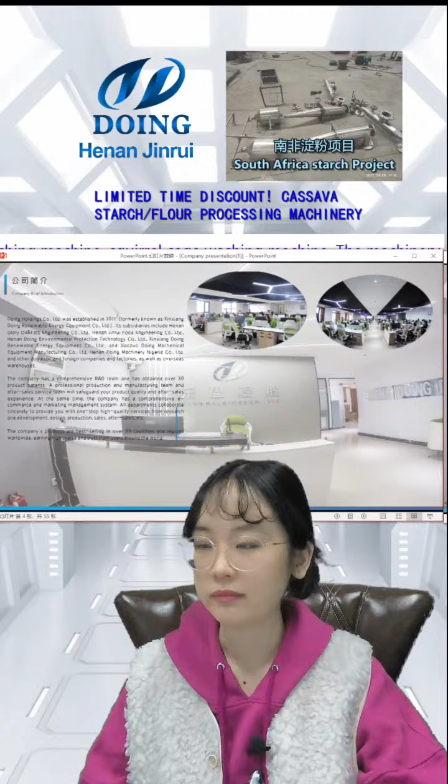So let's get started. First of all, I want to introduce our company's contents. So first of all, it's the company profile. Look here, our company named Doing Holdings. It was established in 2011 in Henan, China, Henan province.

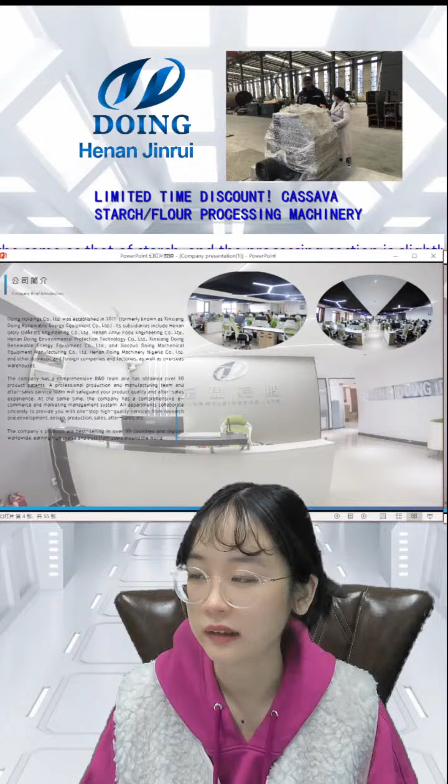We include Henan Glory Oil Fats Engineering Company, Henan Jinrui Food Engineering Company, Henan Doing Environmental Protection Technology Company, and Xinxiang Doing Renewable Energy Equipment Company. Also here is another very special one: our Nigeria limited company, and in Nigeria we also have a warehouse, because the warehouse is overseas in Nigeria.

It maybe can make it more convenient for you to buy our products, and if you have a problem, you can first go to the Nigeria company to find our engineers or sellers, right? So I think this company is very important to overseas customers.

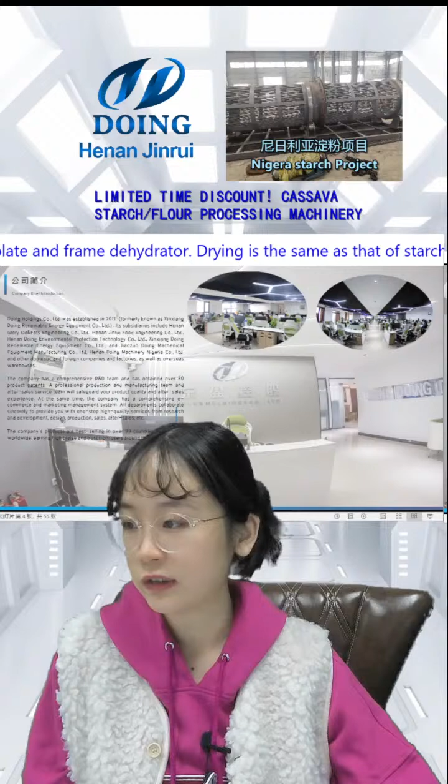Okay, so next. Here is our company, in Henan Zhengzhou. It's a big city, and the transportation is very easy. If you guys want to come to our company, our office, to have a look, maybe you can leave your message in the comments, okay?

And here is what our factory looks like. The factory is near Henan Zhengzhou, and this company is very big. It's like a 40 minute car ride, and we will arrange a car for you if you guys want to have a look, if you're interested in our products.

Okay, so if you want to make some starch or flour, or gari, fufu, or build a factory for this kind of thing, you can contact me. Because we are a very international company around the world.

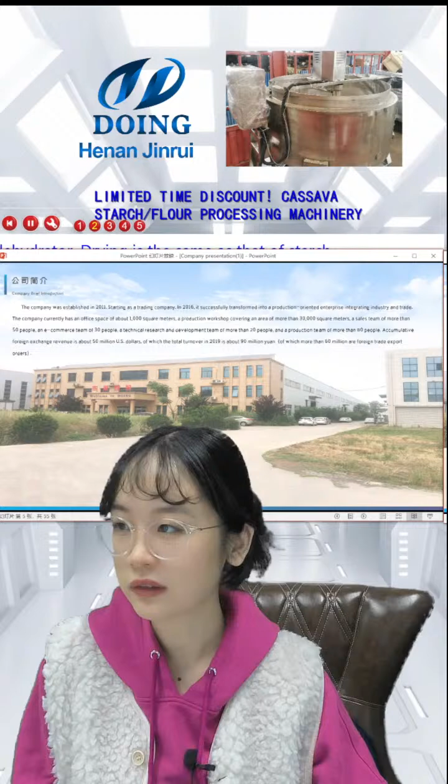Okay, so next one. This is a bigger factory, like this. And here is the company structure. Because we need to make you happy, make you very satisfied, we have many kinds of structure.

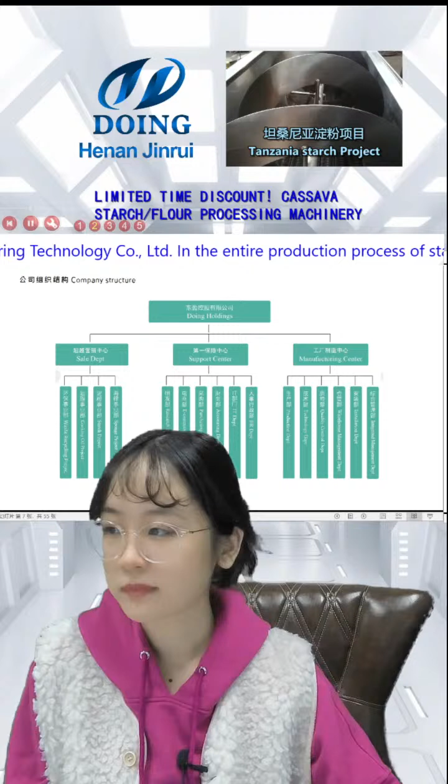Like I am in the sale department, and here is where I stay in, it's the starch project, right?

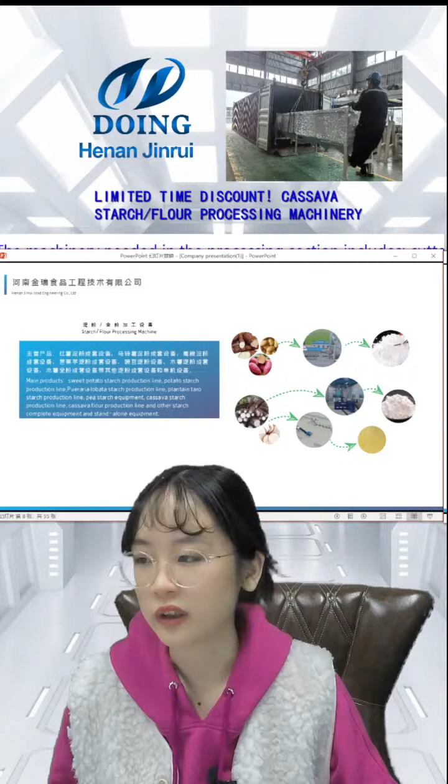Okay, so here are our main products, like sweet potato starch production line and potato starch production line, and also cassava starch, cassava flour processing line. If you guys are interested in our company, please quickly contact me, okay? Because we have limited time discount today.

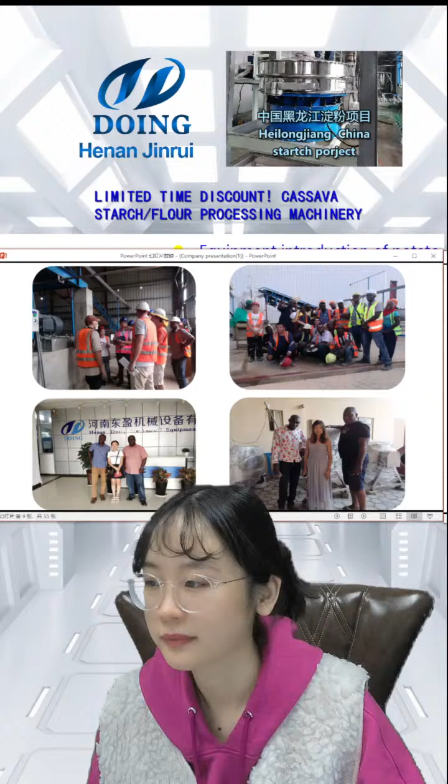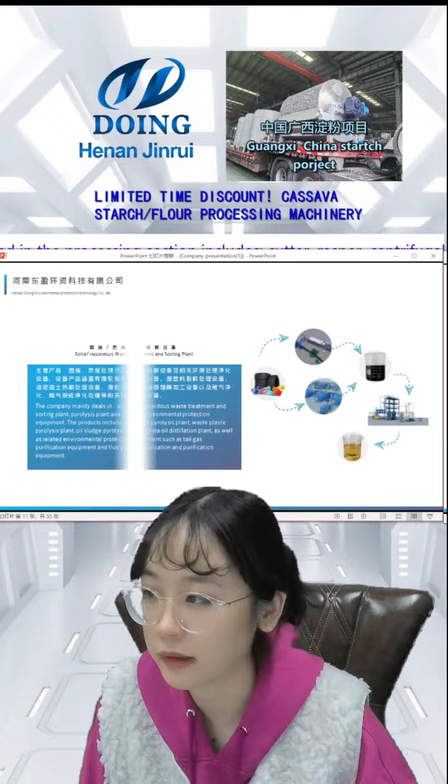Because I'm in the starch company. Yeah, here is also a belonging company, it is a sorting plant. And here is another one. We have 4 belonging companies.

They have different kinds of things to sort. Here is an ISO certificate and the national patents.

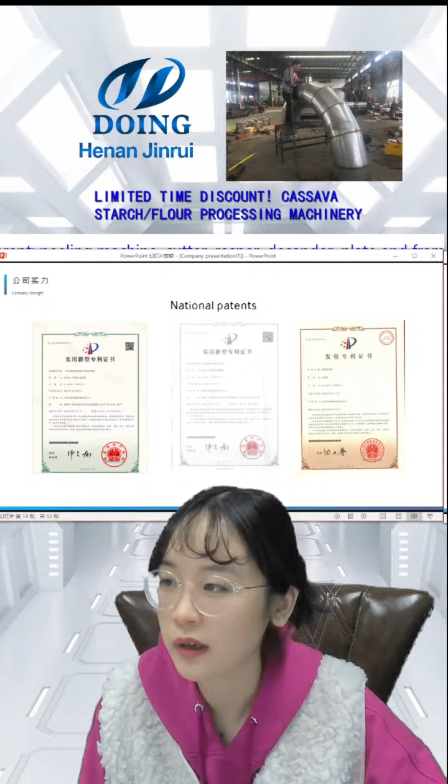So don't worry, our company's equipment is not unsafe or not good. Our company has many different certificates. You can be very satisfied.

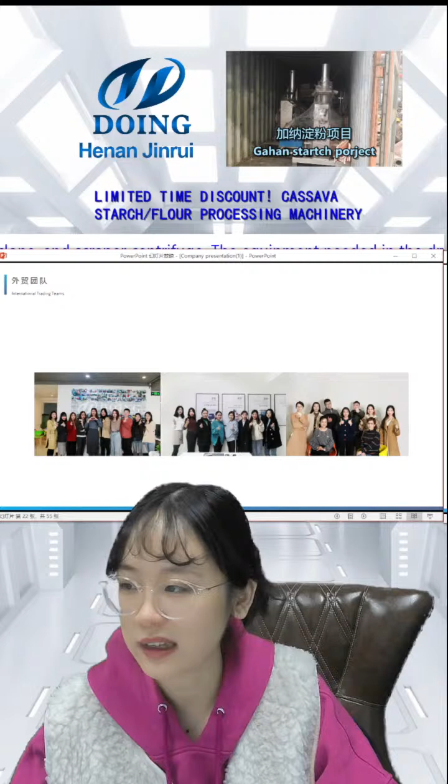Okay, here is our international trading team, and if you come to our company, you can see them. And overseas sellers, e-commerce and IT team, engineering team, and here is our production team. Yeah, here is our factory.

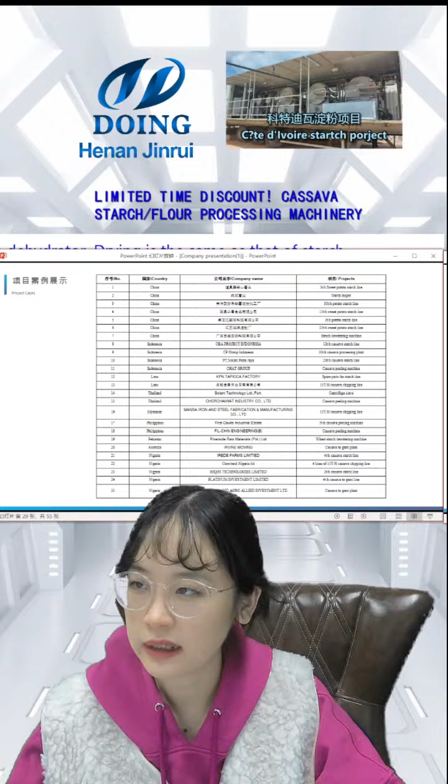And here is our project cases, many different countries, and also in our country, in China, like sweet potato starch line, potato starch line, and Indonesia has a 20 ton per hour cassava starch line. You can have a look.

And DR Congo, Syria, Lebanon, Uganda, many different countries have our projects. Okay, look, here are some photos.

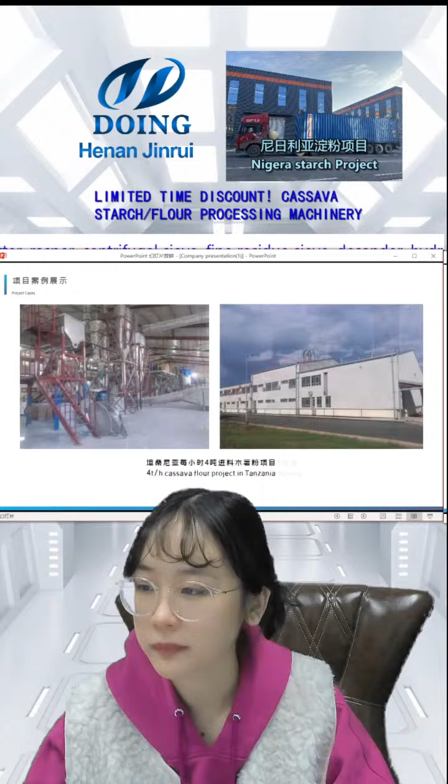And also here, this video is also about our project here. Nigeria has many of our projects. Yeah, this one is also in Nigeria, in Tanzania.

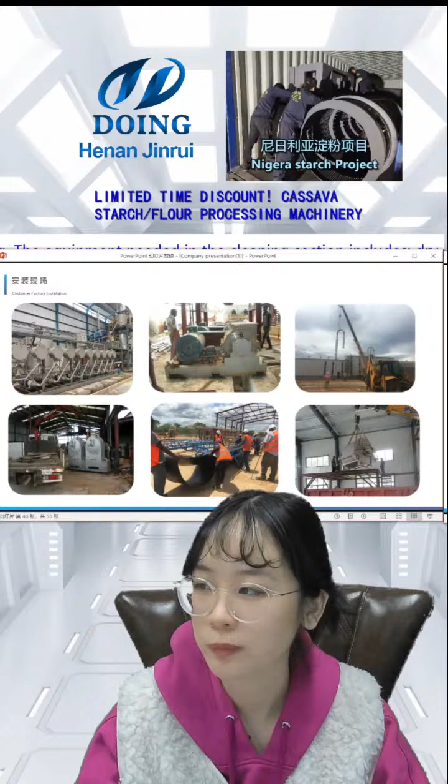Here is machine delivery. And this is the customer factory installation.

Equipment introduction. Here I will introduce what kind of machines the cassava starch or cassava flour processing line needs. Okay, let's go. Here is the cassava feeding hopper for short storage of raw cassava and uniform feeding.

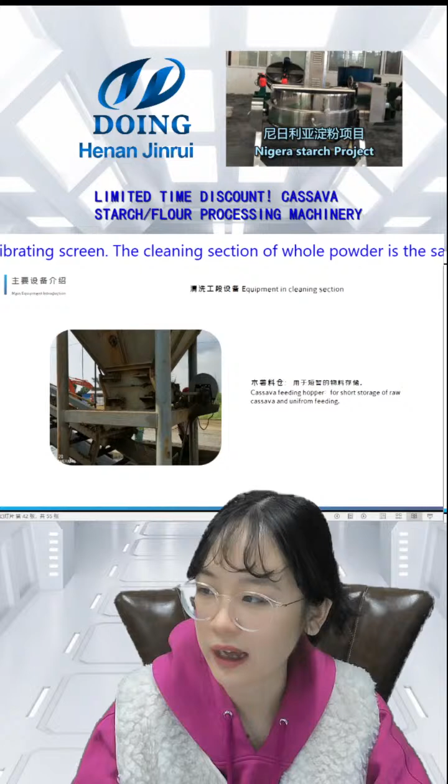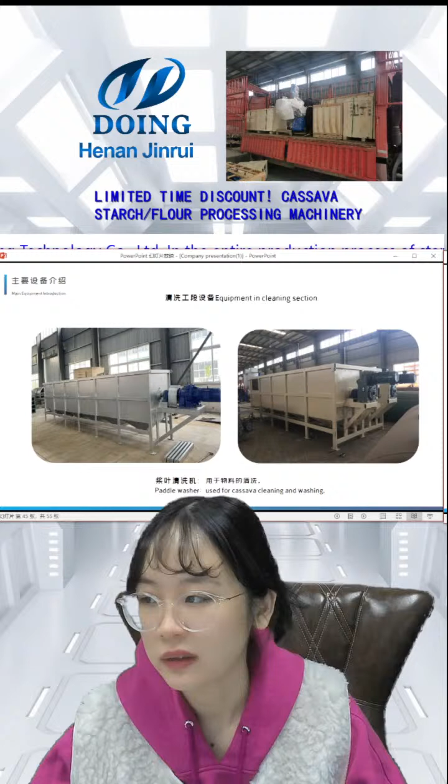Here is the paddle washing machine, the main washing equipment for cassava. If you have different needs, we can give you different kinds of machines. If you only want a small one, we can build a small one for you.

Look at here, this is only one. But if you have a big amount of cassava to process, you can choose the two-pole one, and it will clean the cassava very cleanly.

Here is a cutting machine. It has a knife to cut the cassava into small pieces. This machine is used for crushing of cassava.

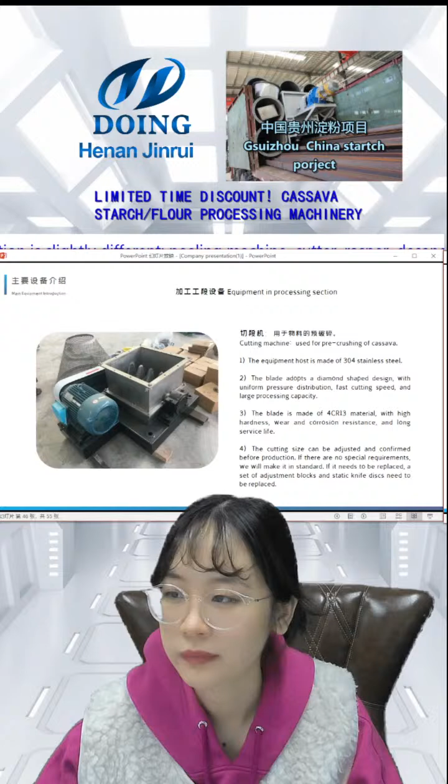Here is the blade, made of 4CR13 material. It's very safe for eating. This knife maybe looks like a diamond. It is 4CR13 material with high hardness, corrosion resistance, and long service life.

This one is for pre-crushing. Here is the second stage crushing of the cassava. This machine is named the rasper, and the rasper can turn the cassava into cassava milk.

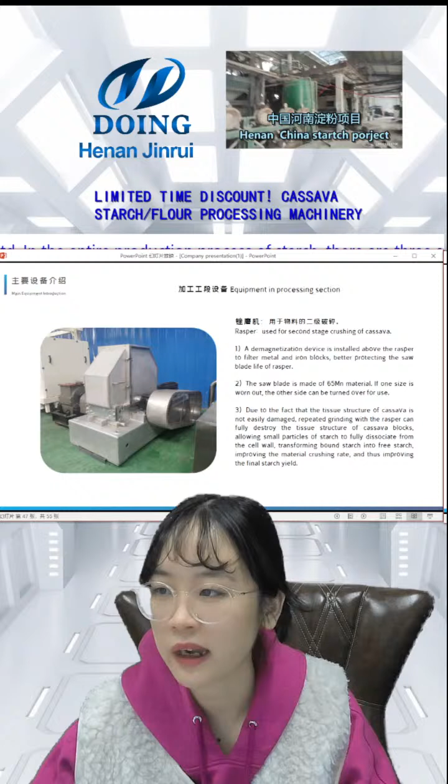A demagnetization device is set above the rasper to filter metal and iron blocks, better protecting the saw blade life of the rasper.

You know, the rasper has many blades. So if you want to protect the blades, you need the demagnetization device. The saw blade is made of 65Mn material.

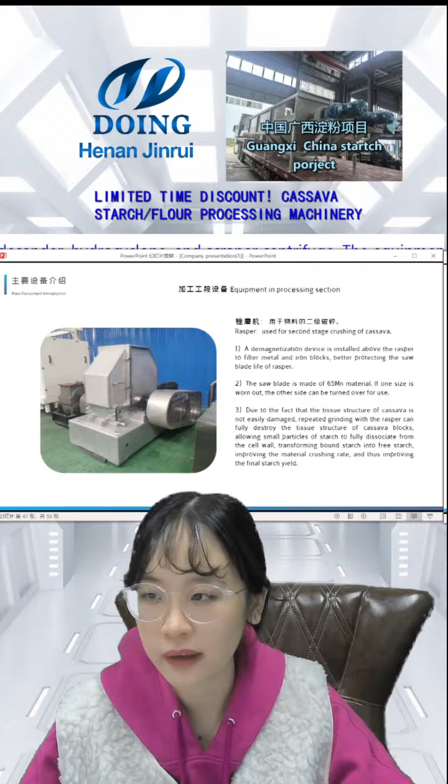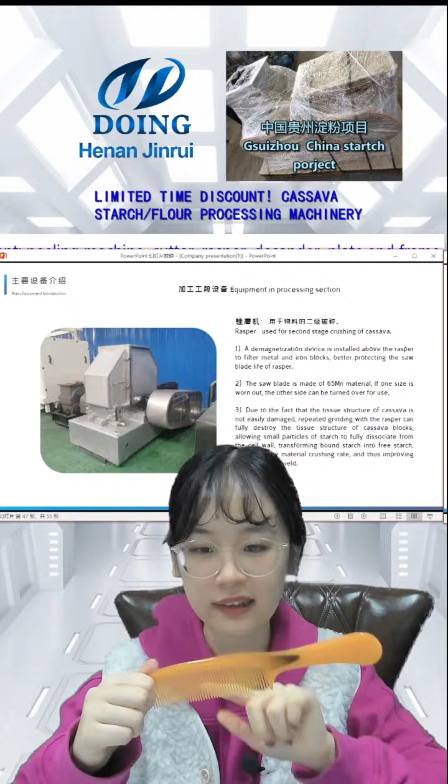It is also good, safe for our eating. If the blade is old or broken, you can use the other side of the blade. Look here, this is the blade, and you can change to this side because our blade has 2 sides - both can be used.

So here is the centrifuge sieve.

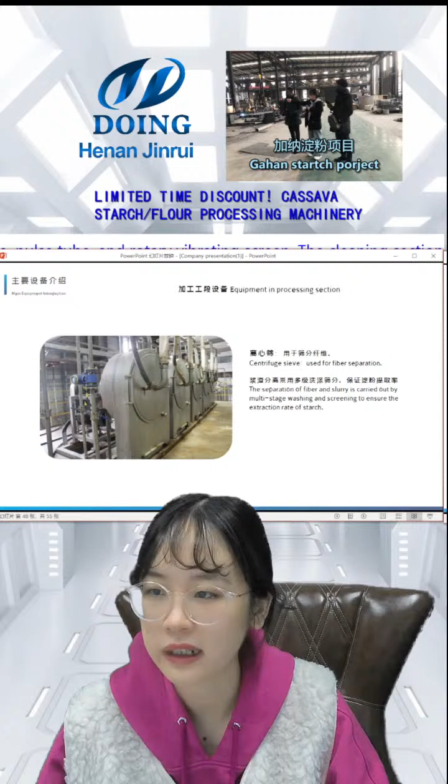For the cassava starch, we need this centrifuge sieve, because the separation of fiber and slurry is carried out by multi-stage washing and screening to ensure the extraction rate of the starch. So we need nearly 4 centrifuge sieves.

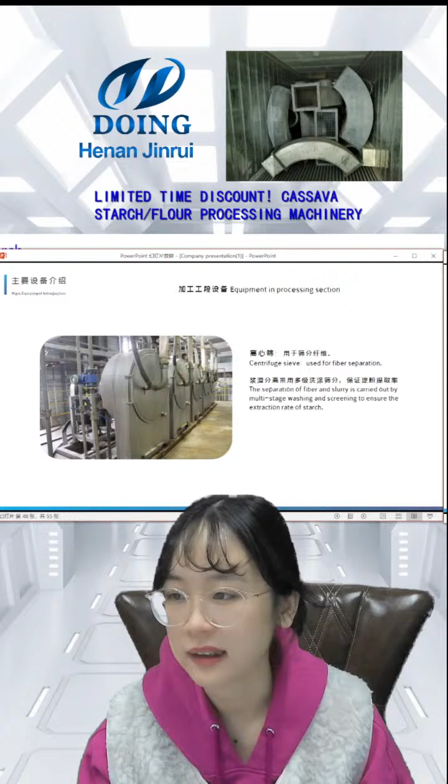One by one, they each have different work, but they all separate the fiber and make the cassava more excellent for eating.

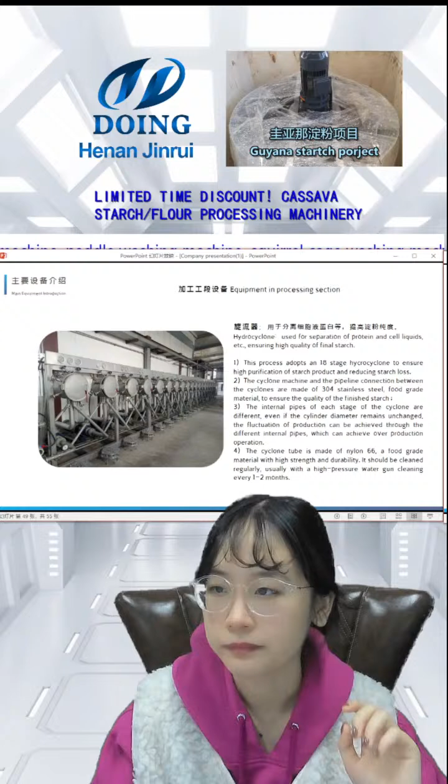In the 18 stages of the hydrocyclone, it ensures high purification of the starch product and reduces starch loss. The pipeline connections between the cyclones are made of 304 stainless steel, food grade material, to ensure the quality of the finished starch. Here is the tube of the hydrocyclone.

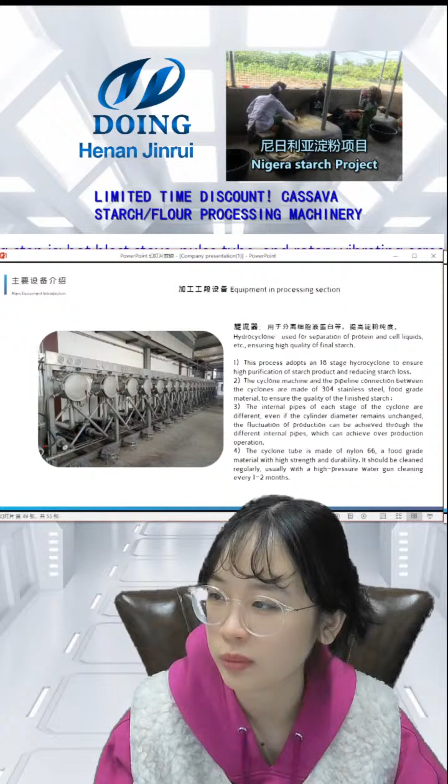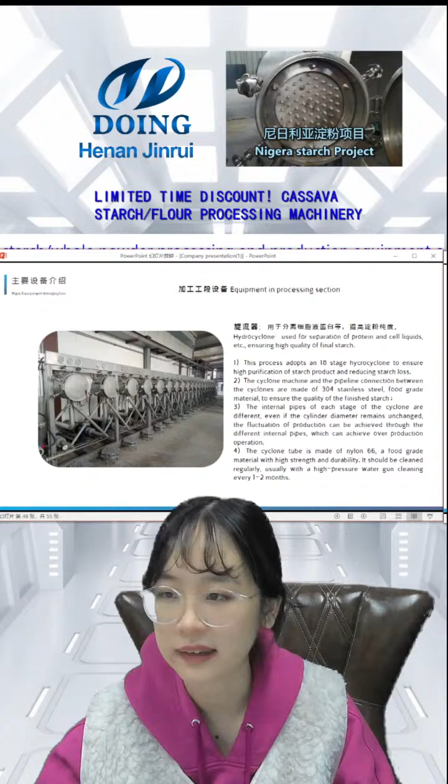Why do we need 18 stages? Because the hydrocyclone is for cleaning and screening, and it can make the quality better. The centrifuge machine sieves out the fiber, but here it separates out the protein and cell liquids, which we don't need. So we need this machine to ensure the high quality of the final starch.

Look at this smaller one, it is the inside of the hydrocyclone, the cyclone tube. The cyclone tube is made of nylon 66, also a food grade material with high strength and durability.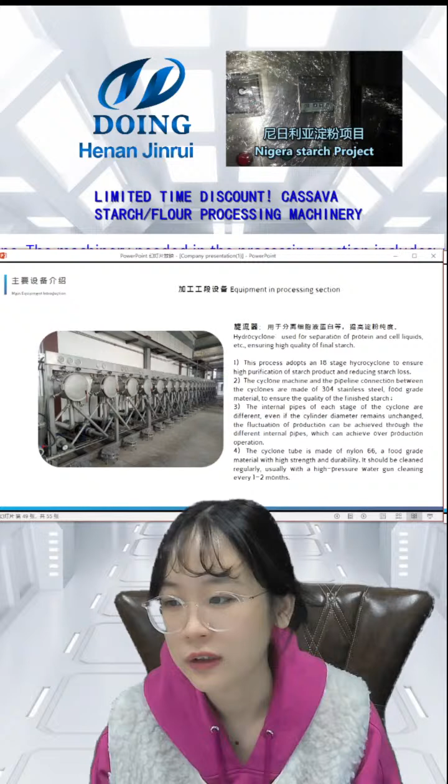It should be cleaned regularly, usually with high pressure water, every 1 to 2 months. It's easy to clean.

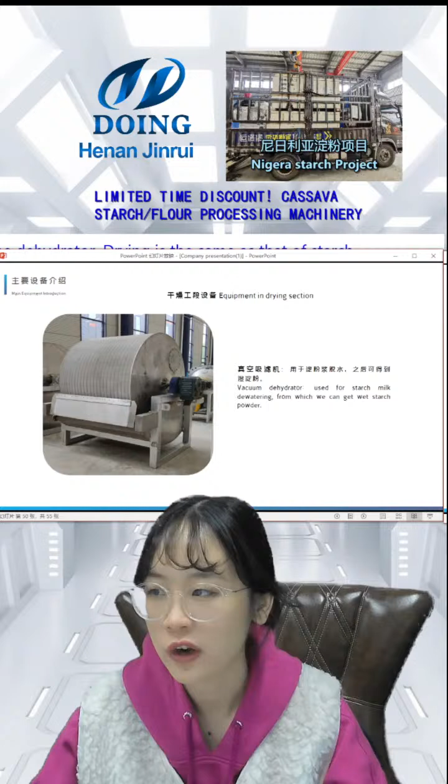So next picture here is the vacuum dehydrator. When the starch milk is in this machine, it will dewater, from which we can get the wet starch powder. It's easy for making the cassava starch drier. We use this big circle drum. It will turn around, and our starch will fall on the surface of the dehydrator.

Okay, next, here comes the flash dryer. It is used for starch drying. Look at here, our tube uses the pulse tube design. This tube may be different from the other starch equipment company because this tube is one thin and one thick. It can control the speed of material passing through, extend the residence time of the material, and ensure the drying effect.

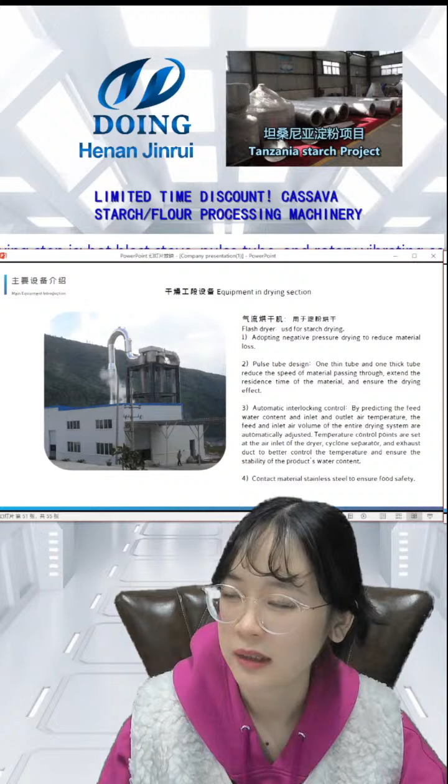Yes, so the cassava starch or cassava flour all need this kind of section. When the material goes into this tube, it will go not too fast. Maybe it can be a little short, or it can use a little longer time, because we need to make all the material be dried. So we use this design.

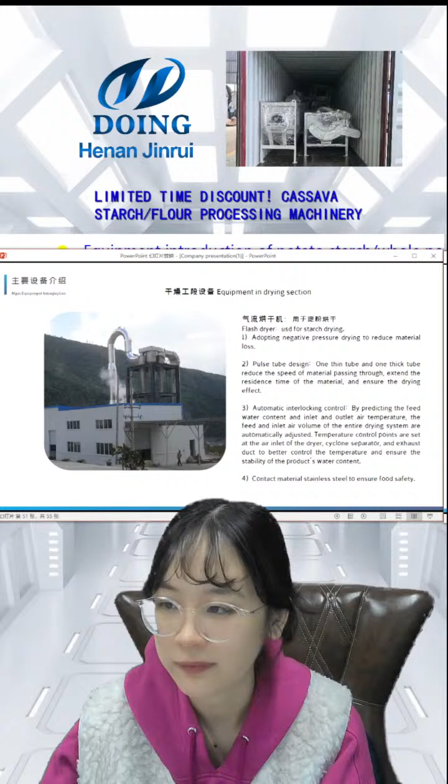And here is the automatic interlocking control. By predicting the feed water content and inlet and outlet air temperature, the feed and the inlet air volume of the drying system are automatically adjusted. Temperature control points are set at the air inlet of dryer, cyclone separator, and exhaust duct to better control the temperature and ensure the stability of the product's water content. This kind of design also can prevent explosion, and it can prevent the starch from running out of the tube.

And this is called the negative pressure drying.

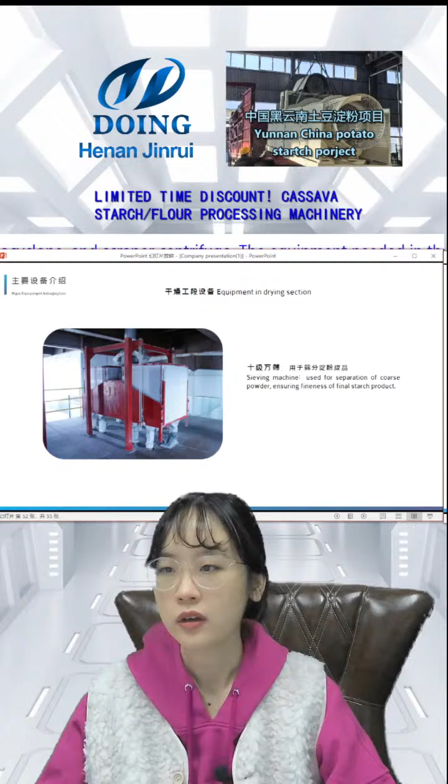And here is the sieving machine, used for separation of the coarse powder and ensuring fineness of the final starch and also final flour. Both the flour and starch need this machine.

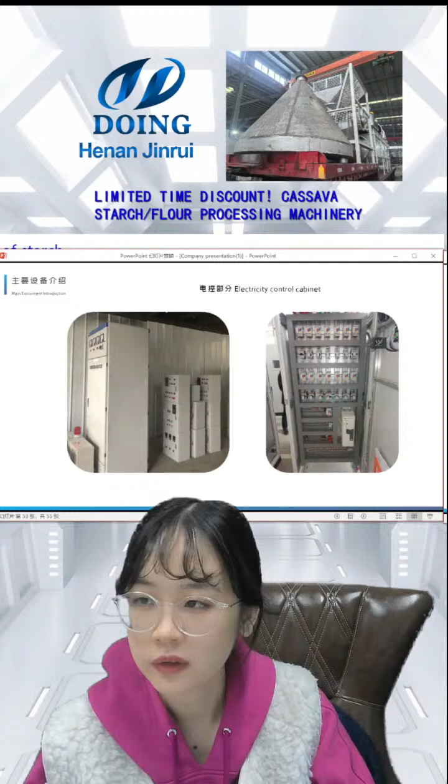And here is our PLC control part. It is a cabinet, and on this cabinet's surface there are many different kinds of touch parts. So you can decide what you want on this cabinet, like you want the temperature to be higher or lower, and also you want to begin this machine or finish this machine. You can choose the starch to be more thin or more thick. So this is the main way of the electricity control cabinet.

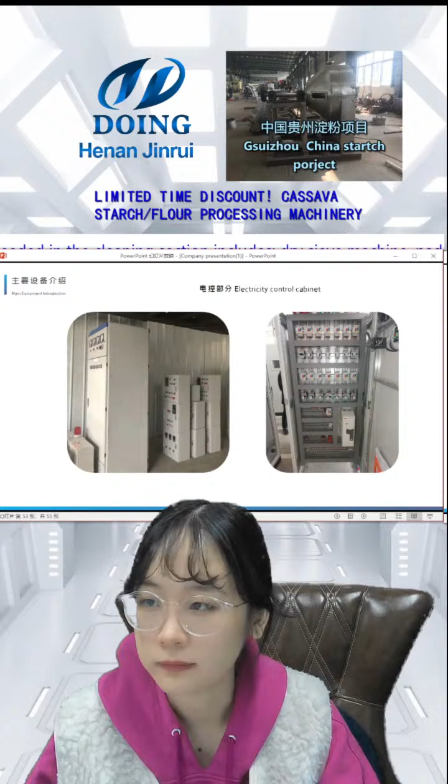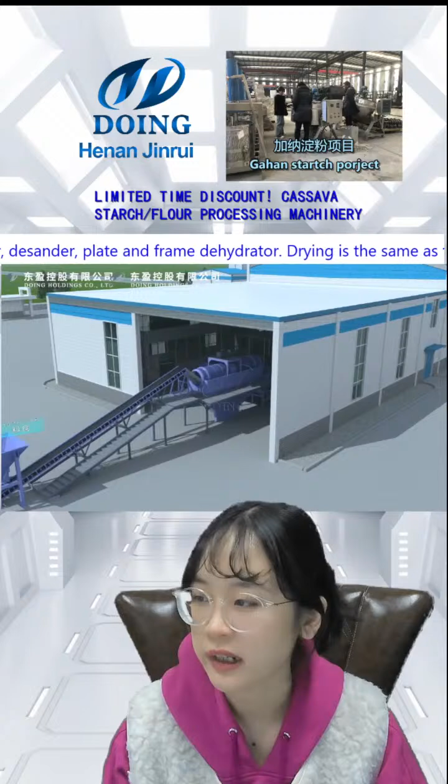And here we also have a 3D cartoon of the cassava flour, and also we have the cassava starch processing line 3D cartoon. So we can have a look one by one. First, here is a feeding hopper. Here is a shaker. The shaker will shake the cassava on the belt conveyor and send it to the dry sieve.

And here is an overview of the factory processing line.

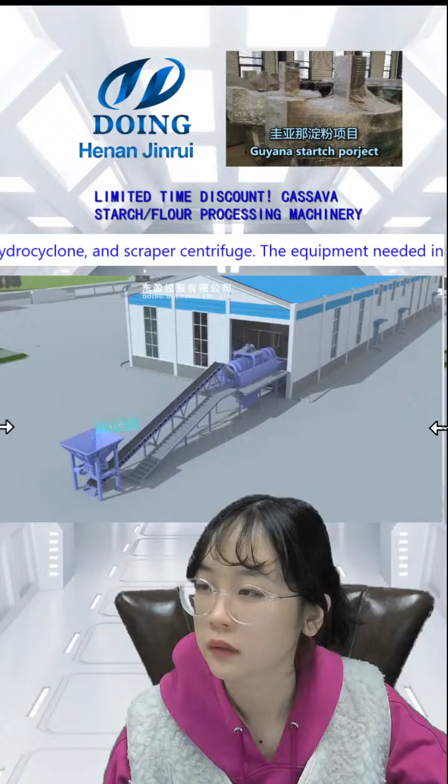Here is the starch processing line. Let's have a look. Here is the overview of all the factory.

So first we use the forklift to put the cassava into the feeding hopper, and it goes to the dry sieve. It can remove the debris from the surface of the cassava, and then go to the paddle washing machine.

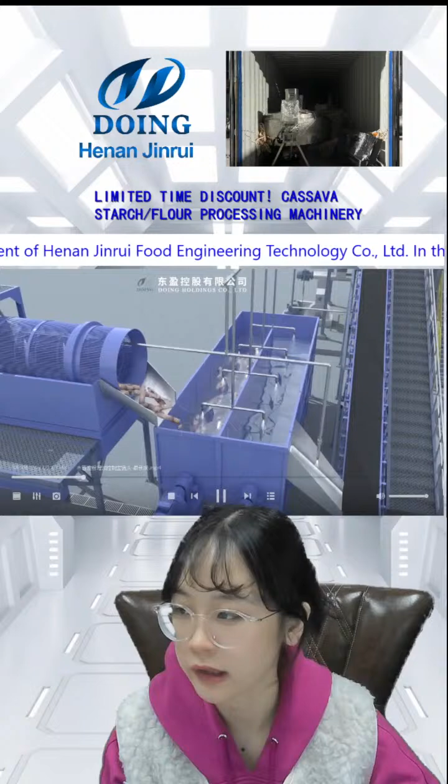The paddle washing machine means that here and here and here have many different kinds of paddles, and it will push the cassava to this U-shaped line. Here comes the water, and the cassava is put into this machine in this way, while the water comes from a different direction, like this side, and on this side it can clean the cassava more thoroughly.

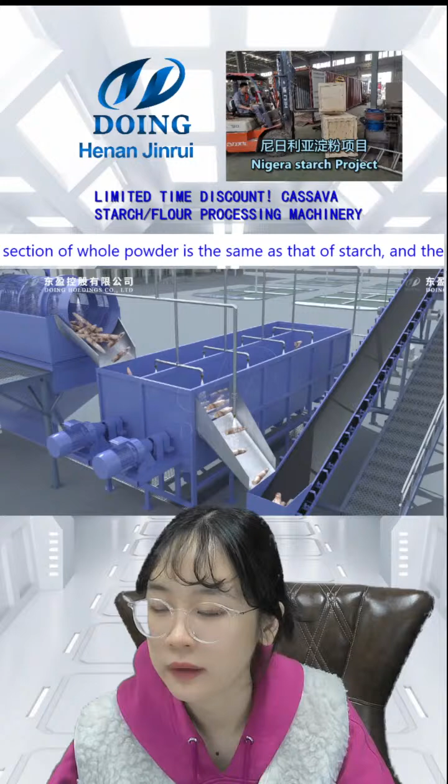Here is another sieve to sieve out the water we don't need, and the water will clean the cassava again and fall into the belt conveyor.

Then it goes to the cutting machine to cut the cassava into small pieces. And if you have a little less money, you can call us, because we can provide you another machine called the hammer crusher. It also can cut the cassava directly into cassava milk, but this hammer crusher is maybe more suitable for gari or fufu flour.

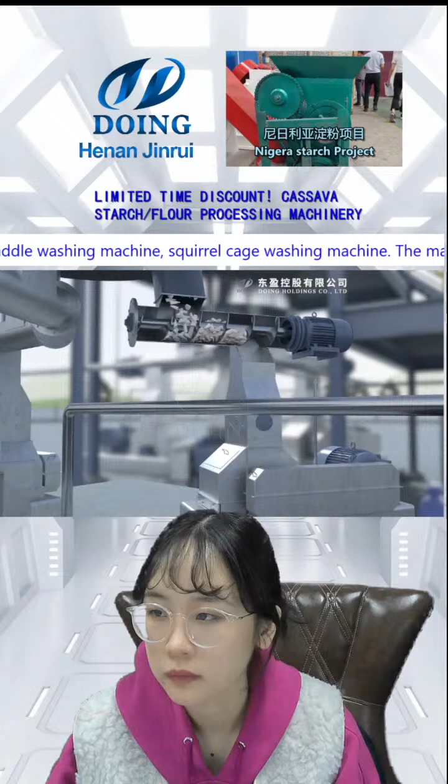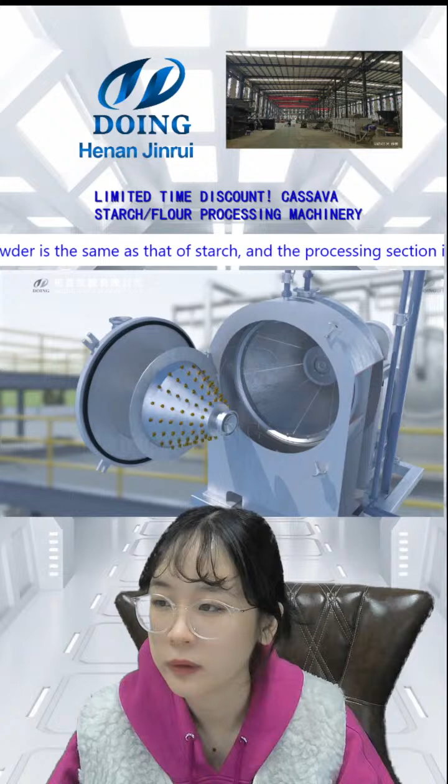And we use this pump to pump into the centrifuge sieve. Look, here are many gold colors, and here is the water pressure. It will clean this circular one. It's named the residues basket, and the residues will stay on the surface of this machine. At that time, we need to use the water pressure to make the basket clean again, like this, turning around very fast.

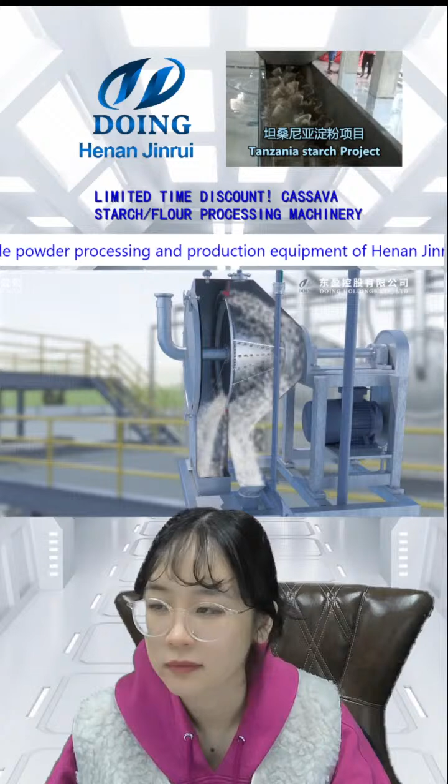Here is the second centrifuge. What can this work do? It can make the first centrifuge's residue be sieved out again. The residue on the basket of the first one, through the water pressure, will go to the second one again to clean and sieve out the starch.

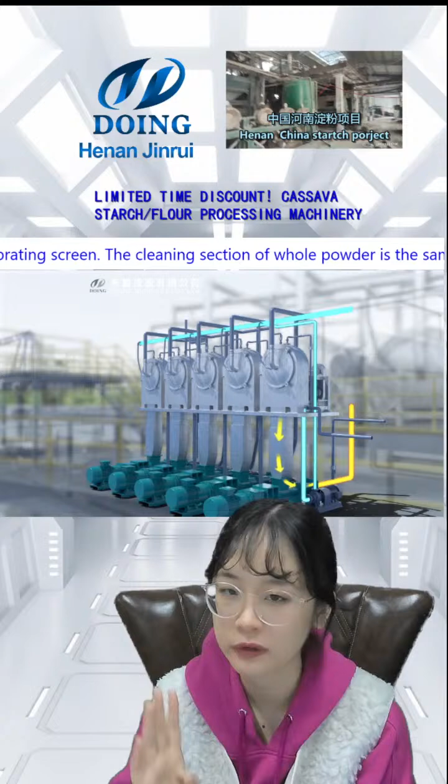The third one also does this kind of work. We suggest you can have 4 centrifuge sieves, it's okay, but this cartoon we have 5 centrifuge sieves.

This is a small fiber sieve. It also sieves out the fiber in the cassava milk and it falls into the 2 tanks.

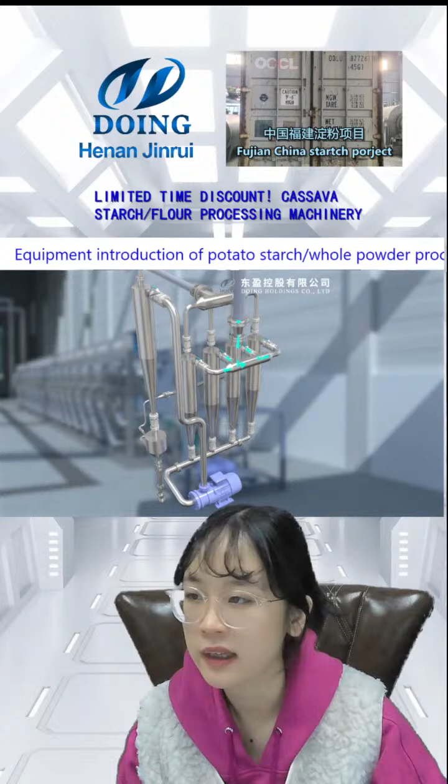And here is the desander. You can have a look. This green line means our starch will fall into this machine, and then the starch will go with the blue line. The sand will go down in the yellow line. You know that cassava grows in very dirty soil, and other debris is on the ground, so we need this step to remove the sand from the cassava. We can use this machine to make the cassava starch, cassava milk, be in good quality.

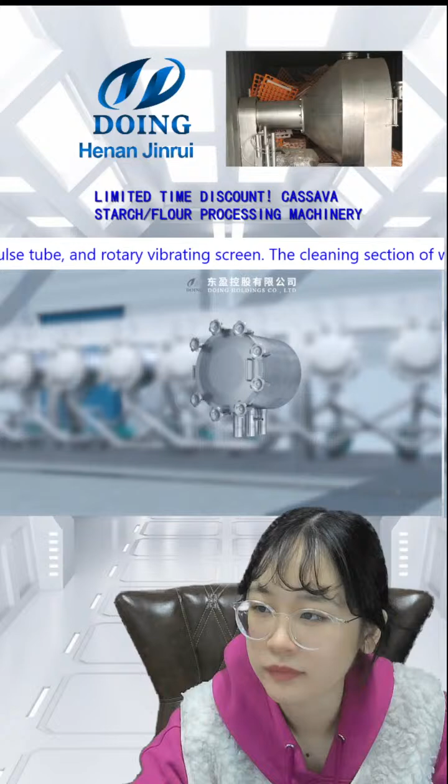And here is the hydrocyclone. Let's look inside. First, here we have many different tubes, the white ones are the tubes. This tube is made of nylon 66 material.

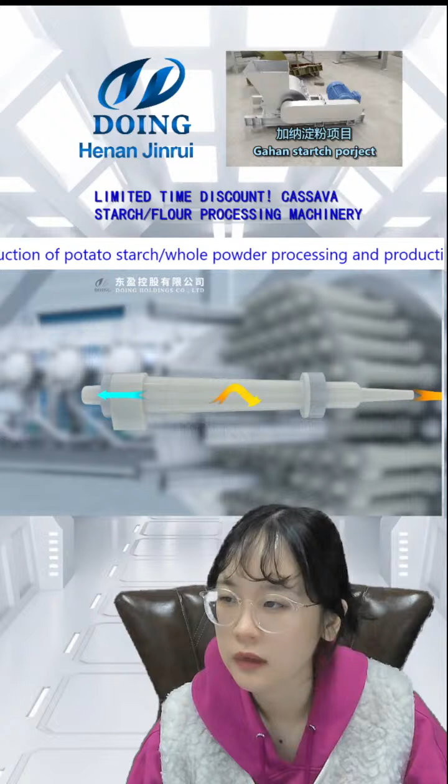The cassava starch will pull into this notch and make a circle, a very fast circle. The protein of the cell liquid will go out in the bigger section at the top, and the starch, because it is heavier than the protein or liquid, will fall out at the bottom.

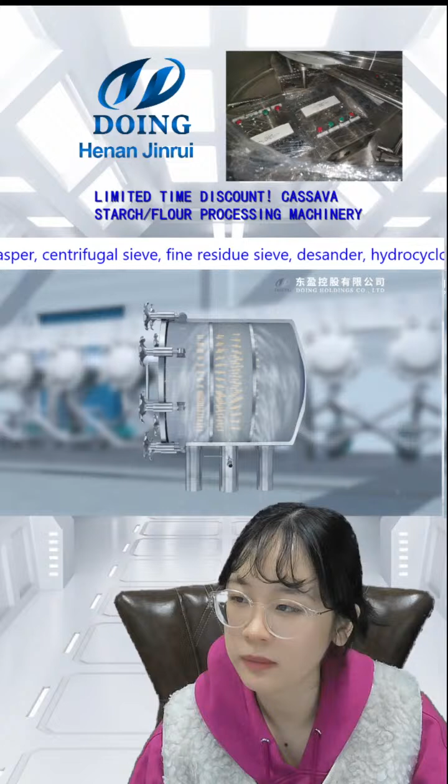So look at here. This picture shows that the middle section is the cassava starch, and here comes the liquid, cell liquid or yellow liquid, and also protein. Here comes our starch.

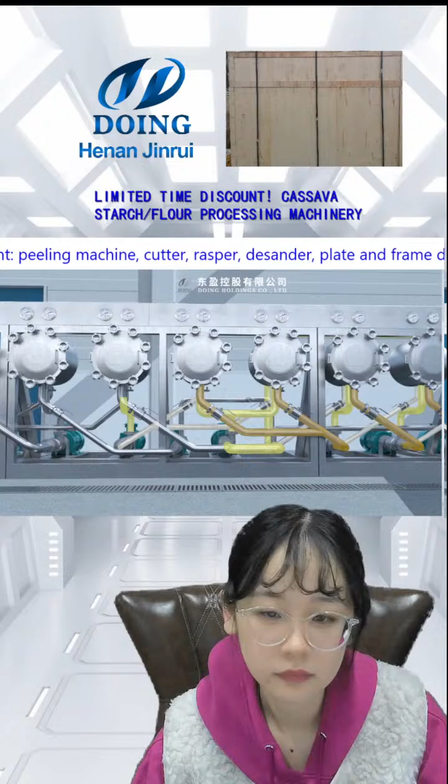Okay, look at the way the cassava milk goes in, one by one. It can make a cleaning process and make the quality be better.

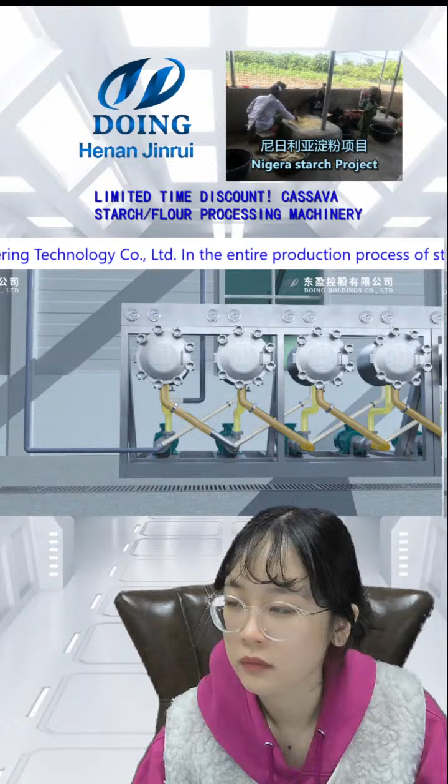So here is another tank. Here is the cassava.

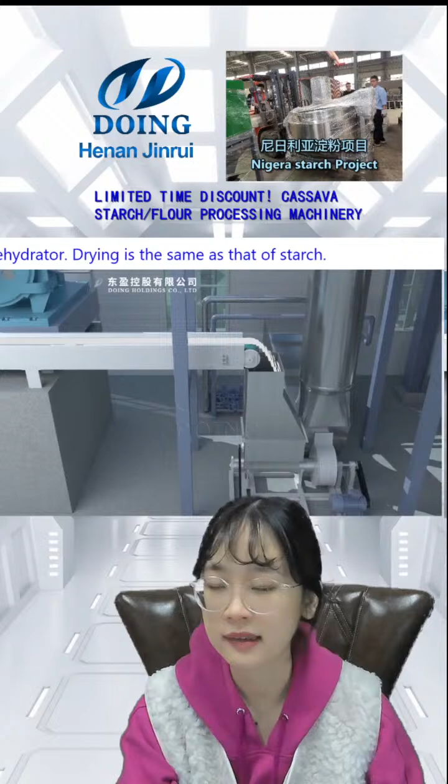And here comes the drying section. Okay, look at this, it's the plastic tube, one thin and one other thick. It can make the cassava stay in this tube longer, and we also use negative pressure to make the cassava dry.

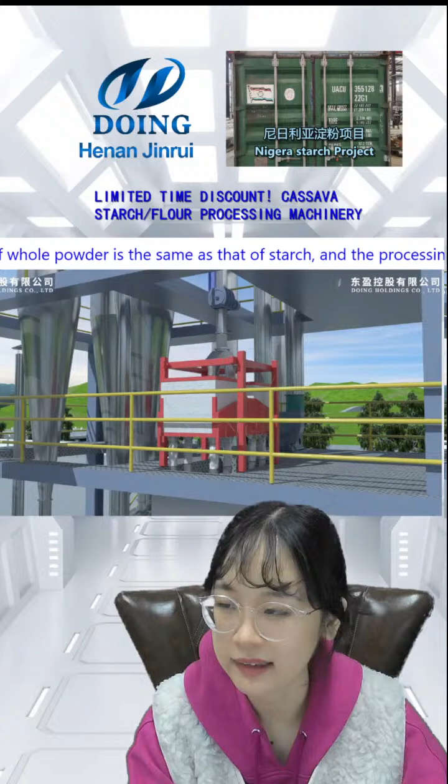Okay, so not the final step, here is another step, it's a sieve. It can sieve, making the cassava finer and thinner. And here is the last step, it will be packaged.

Look, here is the cabinet, the electric cabinet. The electric cabinet can make your processing line more automatic and also save on your labor cost.

So here is the cassava starch processing line. Let's have a look at the cassava flour processing line, okay?

Okay, this is a very short 3D cartoon.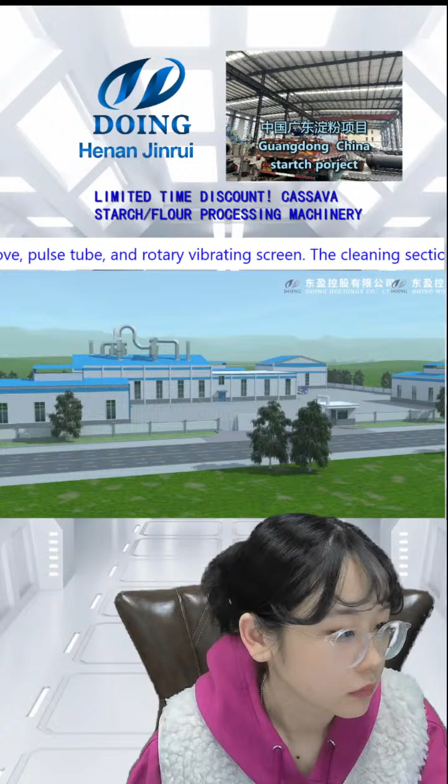Maybe this one will be longer. Yes, this is a longer 3D cartoon. Here is the overview of the whole factory we need. First of all, the washing machine may be the same as the cassava starch one, yes, it's very familiar.

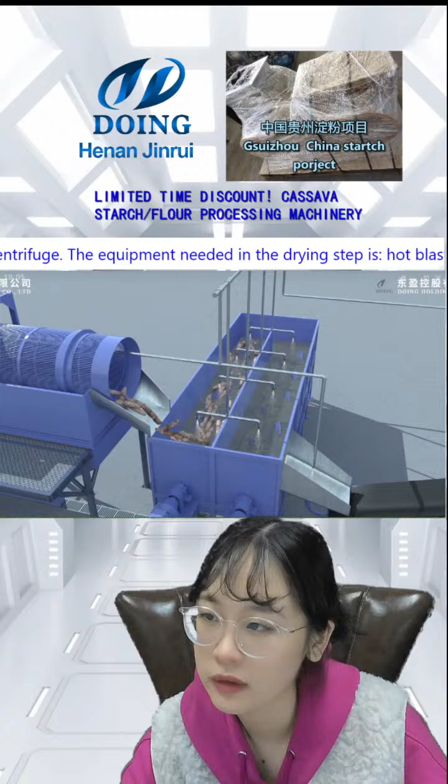If you have a small amount of cassava, you can choose only one pool, yeah, like this. Look, here is a paddle going.

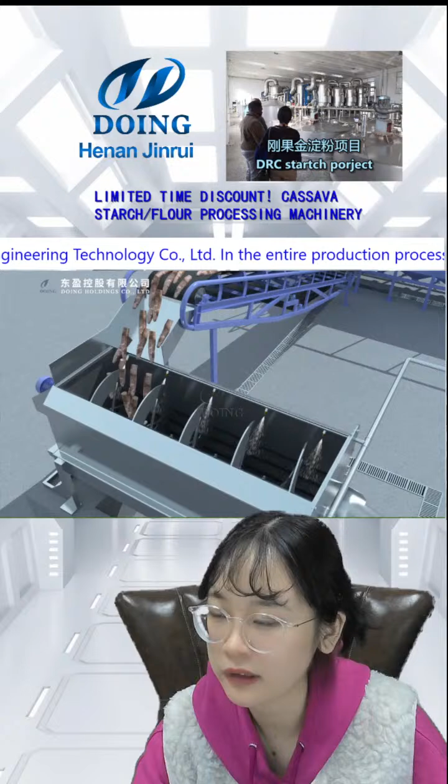And here is the difference. The cassava is washed, then it will go to the peeler machine. You can see here the peeler machine, and in this machine we have different long rollers of sandpaper. The sandpaper can make the cassava... remove the skin, and here comes the water, and it can friction the cassava. Here is a hammer, here you can change the hammer crusher or grinding machine, and also here is a rasper.

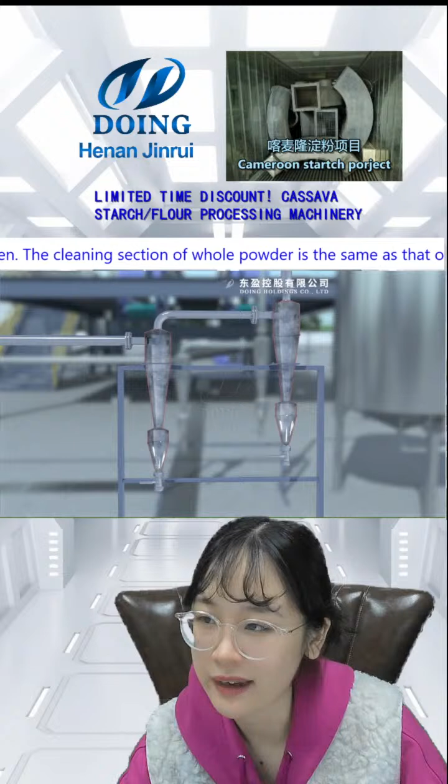Okay, look at this desander. The desander only needs two times to make the cassava desanded, because the cassava is peeled of its skin, so it will be cleaner to make the flour.

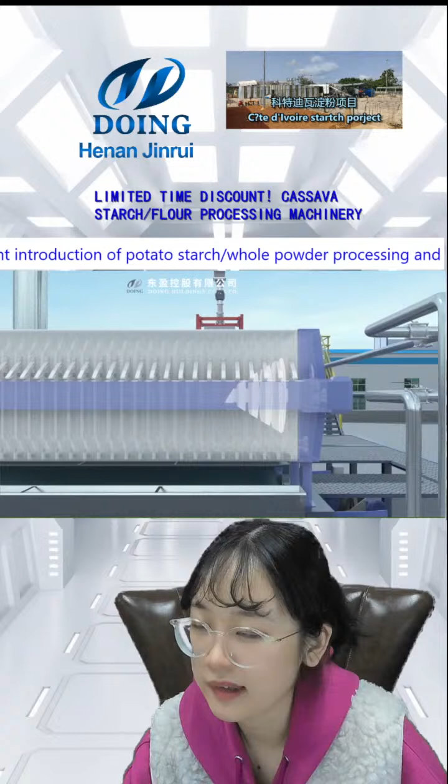And here is a filter. It can push the water out. Yes, cassava will fall into this kind of machine, and through the pushing, the white cassava will fall down. Here is the cassava cake.

Here maybe we need another grinding machine, because if you want the flour to be more thin, here is a grinding machine. And here goes our drying section.

Also use a tube, one thick and one thin, pulse tube and negative pressure to make the cassava flour be more dry.

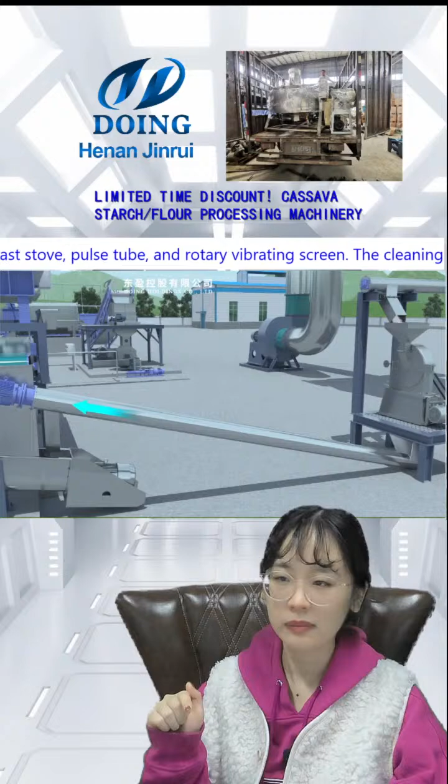And here is the quality maybe not so good. The flour maybe it's bigger than the sieve mesh, so it will be ground again.

Okay, here is also the PLC cabinet.

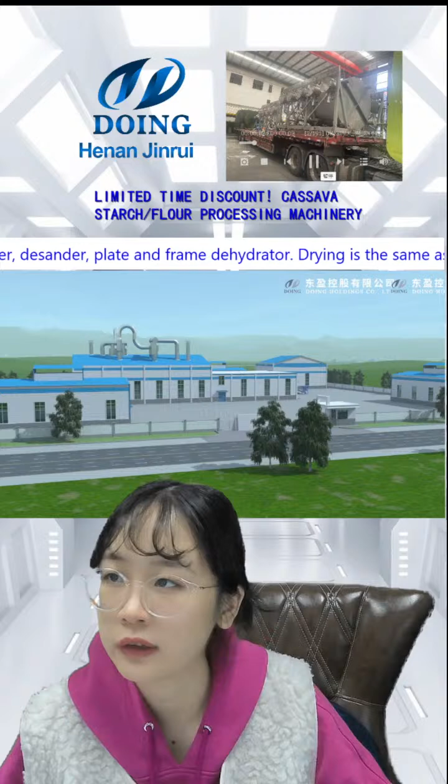So below here, it is the video of the delivery photos, delivery to different countries, even delivery to our own country. Look, here is the Guizhou, Guangdong China starch project. We also have potato starch and sweet potato starch, cassava starch, cassava flour processing machine, and also the gari processing machine, fufu processing machine.

Okay, so the last time we can have a look at the starch 3D cartoon.

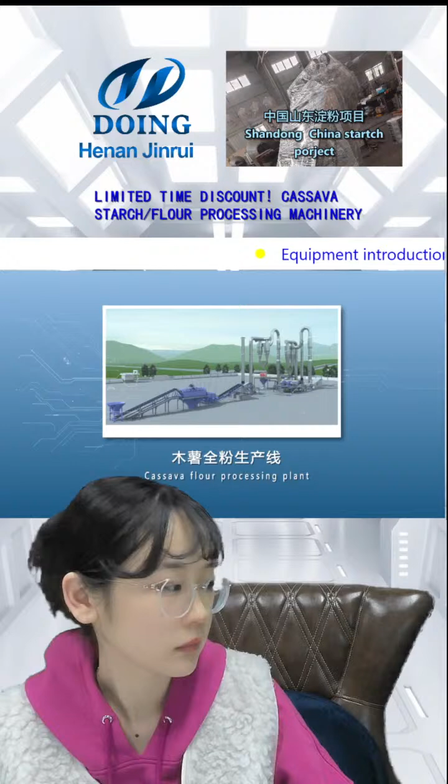The washing is same to the cassava starch. But look at here, here is a peeler machine, just for peeling, because the cassava have too hard skin, right? So we need the peeler to peel the skin of the cassava.

And you know that in this peeler machine, we have many sand rollers, and it is easy to change because there is some lock beside. You can just turn out the lock, and then you can change the sandpaper.

Cutting machine and the rasper, you can change it to the hammer crusher or grinding machine.

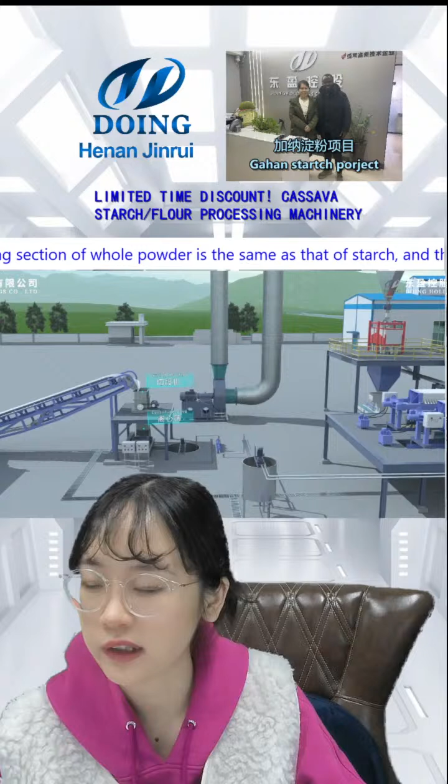And here is a filter press. Filter press, it can press out the water in the flour, right? So this kind of machine can put out 98% of the water.

But we also have another machine. It's named the dehydrator. Dehydrator can push out nearly 18% water.

And here is a crusher to make the cassava cake be more thinner, make the flour be more thinner, right?

And here is the drying section. We use a special tube, like one thick and the other one is thin. It can make the cassava flour or cassava starch stay in the tube for a longer time, but not too long, it just stays for 1 or 2 seconds. And it can make the cassava be more drying.

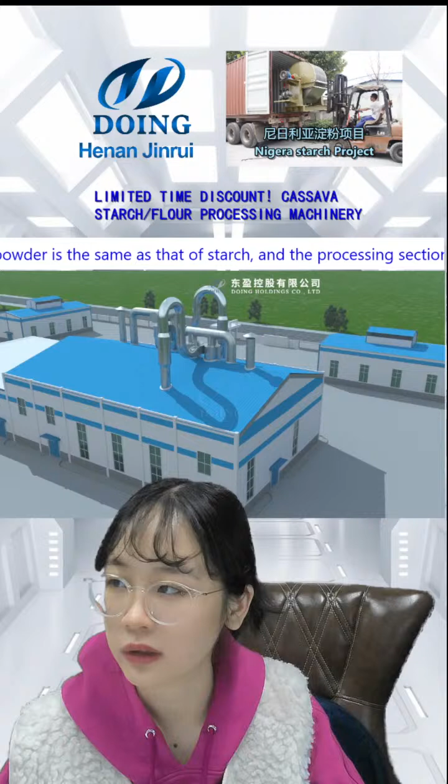And then this section uses negative pressure to make the cassava flour or cassava starch be more drier. It can prevent the explosion and also can prevent the flour from running out of the tube. So this design is very... it can make you be more satisfied, maybe.